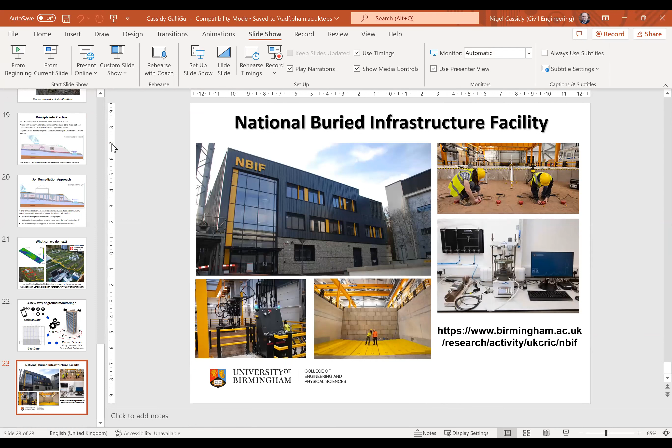Okay, is that still the slides? Yep, it's gone down to number 23. Okay. Okay, hopefully that should have all worked. See your presenter view, so see the notes and things. But... Okay, right. I'll try stop share. Like I said, it was working like a second ago. We'll see if we can get ourselves back on slide. You would think after all these years of running this, it would all work. Is that okay? You got me now? Yep, see the weird soils of Widnes. Excellent. Okay, cool. Fantastic. We got there. So sorry about that, everybody. As you can see, I'm just manipulating my prop at the moment. So I'll put that one to one side. Hopefully you can see me.

Welcome on to the talk. This is lessons for both me and for everybody else as well, I hope. But also a little bit, we were talking about this just before we started the talk, about how we need to maybe think about what we do about geotechnics, geophysics, geology, how we look forward about the information we've gathered over the past. So throughout the talk, I'm going to talk about some of the work I did 20 years ago, which is just as relevant today, if not more. Some of my experience of working with this weird material, and it is quite freaky in a good way, an interesting way. And also a little bit about what do we look for in the future and what can we do to help remediate some of these contaminated land legacies.

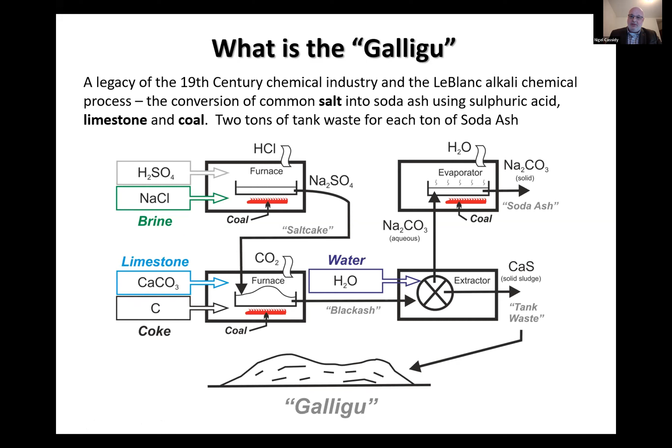So if you think of the sort of geographical connections around the UK, you need brine, limestone, plenty of coal, water, and also an environment to do this. And this is really one of the reasons why these industries built up in the areas we're familiar with. So the soda ash industry is predominantly around the Runcorn and Widnes area because of the brines and obviously the Lancashire coalfields, but also the ports.

But Glasgow, Manchester, particularly a place called Bolton, there's an interesting little case study about that. Gateshead up in the northeast, and also in the West Midlands. And I'm talking to West Midlands people here. I don't know where they are in the Black Country, but I believe there were a couple of smaller Galligu sites somewhere in the Midlands. And afterwards, when we have a chat about this, I would love to know where they are to add them to this lexicon of Galligu sites in the UK.

And it's very interesting if you look at the history, part of that process is not only the geological and geographical, but also about basically the land and the people. We needed water for the processes, but we also needed the water to actually transport the materials to the ports. So you see the connection between the canals and the ports. We also needed the land, basically poor land, to dump the wastes.

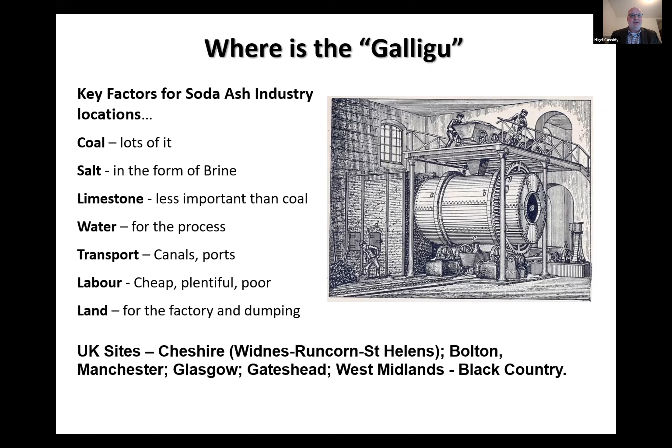And you need plenty of cheap and plentiful poor labor, people who needed the money, because some of the accounts you read about what they were doing, having to carry hods of sulfuric acid around, and the environment they lived in really tells us a little bit about our industrial history. We talk about countries in other places treating workers. We've done the same ourselves, and this is a legacy in our contaminated land of that.

And there's a problem with the Galligu. I worked on this 20 odd years ago, and in the Runcorn Widnes area, there was a significant number of independent plants that used to take this Galligu tank waste and just dump it all over the landscape. And they actually used it as infill for the salt marshes around the Mersey. So if you go over the Runcorn Widnes Bridge now, from the Runcorn to the Widnes side, pretty much everything above sea level, particularly near the coastal marsh areas, is made of Galligu waste.

And in some places, this is 3, 10 meters deep as a deposit. And it's sunk into the marshes and into the alluvial sediments of that area. And there's hectares of this. There's over 200 acres of known highly contaminated sites. But the whole area, the Runcorn Widnes Bridge is built on it, the landing areas of the bridge, the railway line, the expressway, freight terminals, shops, houses, commercial retail were all built on this waste. And the principle then was to cap it, seal it, and not worry about it.

But one of the big problems is it gives off hydrogen sulfide. It stinks, basically. It really does. If you ever drive over to Speke Airport from the Cheshire side or the other way, you get to Widnes and you go, what's that smell? And you can smell the hydrogen sulfide in the air. And at the time, it was known, even the manufacturers, the processors, the historical records show that this horrible smell of rotten eggs around these plants, not just Widnes Runcorn, basically blighted the whole areas.

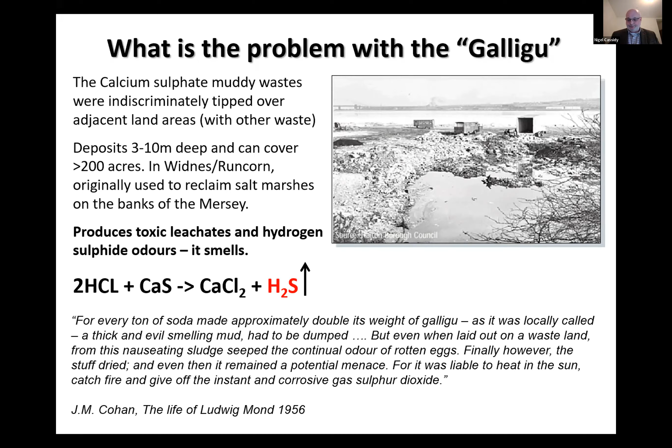So let me tell you a little bit about a classic legacy site, and there is a kind of geotechnical environmental end to this, but it's the fantastically named Nob End site in Lancashire, which is just south of Bolton. It's on the confluence of the River Irwell and the River Croal. Now, this was a site that had a LeBlanc processing manufacturing centre from the mid-1800s, and was dumping this waste into this promontory. I hope my mouse is working. So the Nob promontory between the River Irwell and Croal for best part of 100 years.

At the end of the 19th century, it was just demolished as a site and left in a relatively stable state for a long time. So I've taken this from Phil Sharples' historical blog and letter about this, and it's really interesting because he's followed this historically over pretty much 50, 60 years, about how this site has developed and what's happening to it geochemically and environmentally. If you go back to 1961, the site's a barren wasteland.

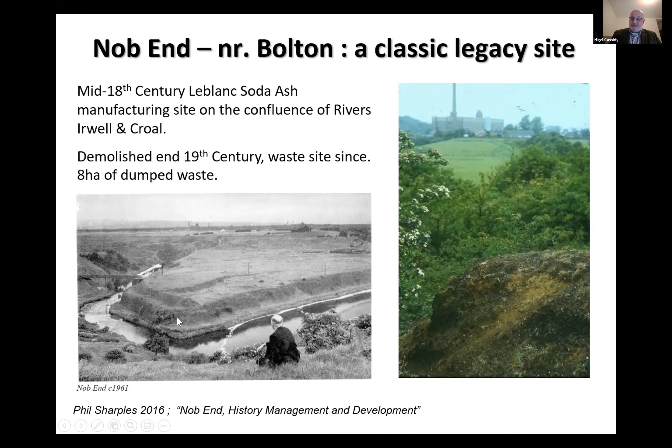And yet, as time moves on, in the 70s, it starts being left alone. It starts to develop its own ecostructure. So you start to see grasslands growing. And what you can see in the picture here, this sort of cliff wall on the sides of the River Irwell, this is all Galligu waste with some other waste in as well. And this whole area is just a mass of this waste, yet it's been left alone and left to basically sit there and start to self-remediate.

And what I find very interesting about this is when we look at the sites that we're remediating now, which we'll get on to in a second, there is a natural process operating at the surface of the Galligu. It's calcium sulfate. And as it starts to be weathered down, it starts to turn back into calcium carbonate. So we're actually getting a geological change, a diagenetic change, if you want to say, at the surface as the stuff is being weathered. And as that's buried, we're actually creating a layered chemistry in the soil. And that becomes important when we think about the geomechanical properties a little bit later.

If we look at this now, I took this from Google and from Dave Darlington's 360-degree image, taken in the last year. The whole site is a site of special scientific interest. It's actually a nature reserve. You can go take a walk around it. It's just off the other side of Little Lever near Manchester.

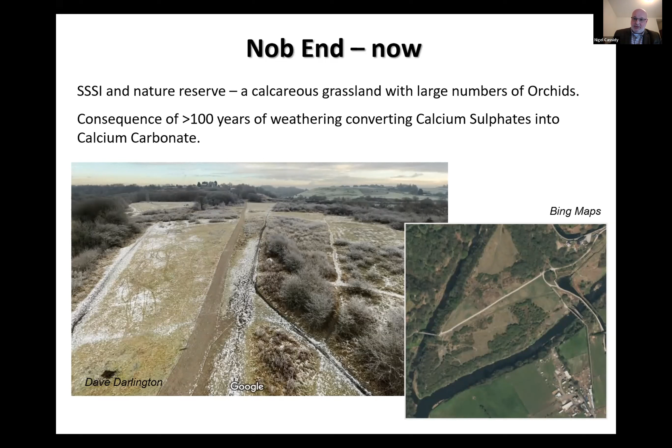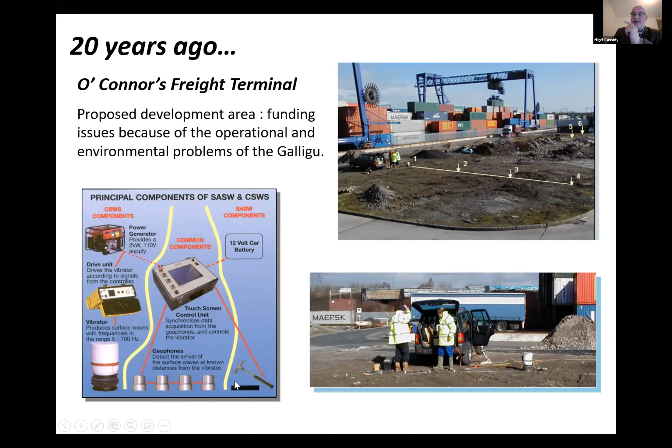So we did this trial, and we brought a team in to do a relatively basic survey that involves putting a sweep of frequencies into the ground, measuring the seismic response, and then determining the shear wave velocity through the Rayleigh wave velocity, and that moves us on to the stiffness. So going into a little more detail, this was cutting edge technology at the time. We have a vibrating seismic source, which is relatively commonplace now, and a geophone array, basic survey stuff.

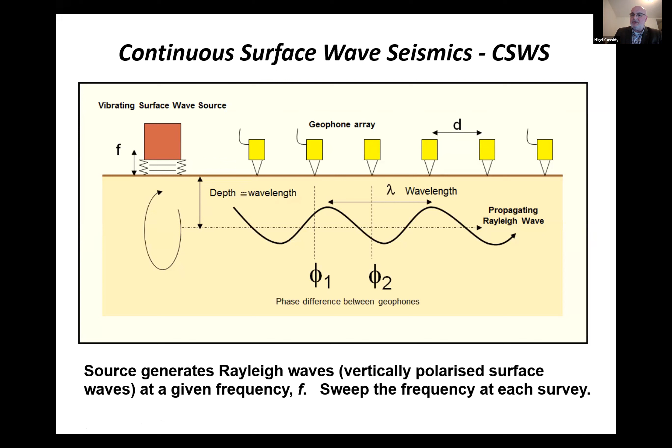But what we're able to do, if we collect properly, is understand the phase difference between the geophone positions, knowing their exact location and the fact that we are propagating in a known direction. And we sweep the frequencies roughly from 5 to 700 hertz in this instance, but now we can go higher, and pick up the surface wave, the Rayleigh wave velocity, which we then convert to a shear wave velocity with depth. And all we have to do is know the density of the materials.

We don't have to know it highly accurately, but we have to know it with enough consistency to be able to do that conversion. And the theories are here, but the important thing is the result is a stiffness profile with depth. And because the Rayleigh waves sample a deeper section of the Earth with lowering frequency, we end up, once we invert, and we have to do an inversion process through that. So the mathematics has improved over the last 20 years dramatically. We get very accurate results, but how representative?

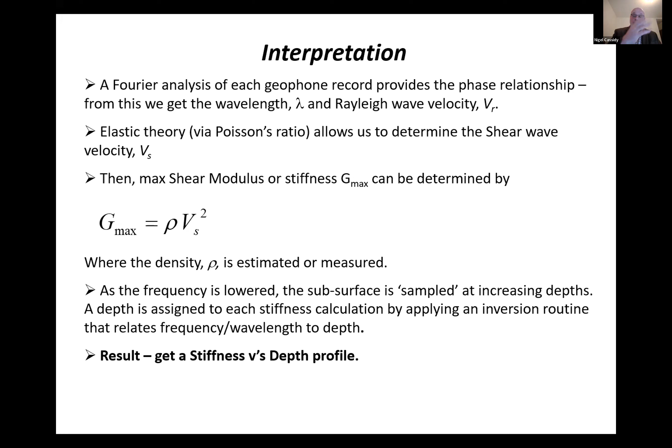What is really important, and it's important for me, is the materials don't change over small periods of time. So even though we might not be fantastically accurate in an absolute way, the relative difference in S-wave velocities helps us understand the stiffness profiles relatively, and that allows us to have a before and after comparative monitoring process for any remediation we may want to do for any of the Galligu sites.

And if you look at the depths, and this is important, the depths that we're picking up just with this active method, we're getting down realistically to 12 meters, in some cases 15, depending on how well the signals travel through the ground and how attenuated it is. But importantly, at the higher frequencies, and up to about 1 kilohertz is really where we go, you're getting that very near surface resolution. And that's important because as an active method, you're getting the depth and the accuracy and the shallow resolution and accuracy to give you a complete profile. It also means, because it's an active source, it's controllable, and you can repeat it on a regular basis.

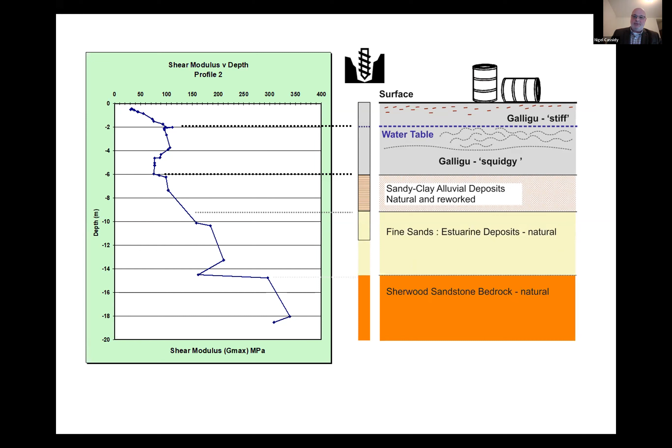We found that actually you don't need to have a very good handle on the density as absolute. As long as you have a good mass density, you bring out the relative changes in the stiffness profiles, because all the materials are very similar in density. So actually, any changes are related to the stiffness properties, the geomechanical, geotechnical properties. Not all sites will give you that, but it gives us a little bit of hope for future monitoring.

And so how do we fix this material? Well, predominantly, the current methods are we basically encapsulate it in concrete. We mix it with cementitious material. We create these little pellets, these hard pellets, and we put it back in the ground. And this was trialed on the site 20 years ago, and cement-based soil stabilization is still the preferred method. They either do it in soil, I'll give a little example in a minute, or they do it externally and put it back in.

And this adds lots of problems for contaminated land sites, issues, materials in, materials out, etc. But the point is that this actually starts to remediate the geomechanical properties. It makes it stiffer. It's expensive. It takes time, but you can create areas, rafts or blanket areas where you can remediate the materials. You're effectively creating a slab of stiffer materials, but only at this time. So you're adding concrete, stabilizing. The Galligu material is still wrapped inside these balls. It's still there as part of the subsurface.

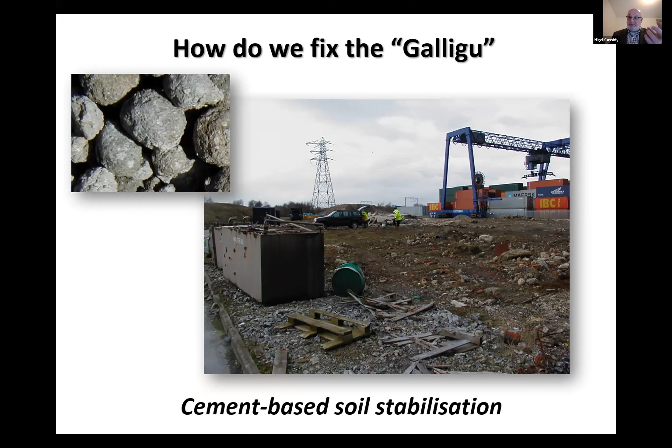And they would have to remediate the site, and they looked at the soil cementation process. But they also wanted to do an activated carbon plume remediation program where they're stopping these leachates reaching the canal, which is an absolutely great idea, a fantastic case study, very much based in my mind towards the environmental aspects of this, with the geomechanical, geotechnical aspects.

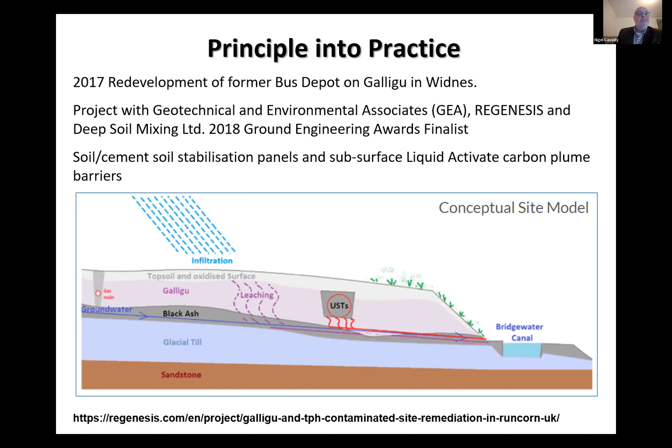And their remediation strategy was to put in an in-situ remediation, create the cement stabilization, mixing the soils. A company called Deep Soil Mixing were involved with this. I'm not familiar with them. And they created these blankets, these patches of stiffened ground in situ that still contain the Galligu, but were a lot more stable. And they were small, in a grid of small panels across the whole site, which is a fantastic idea. They put the plume stop barrier in to stop the leachate getting through, and they created what I think is an excellent remediated site to address the issues that we have now, and they're able to build on it.

But, and this is my question, and this is why I want to open up to the future and the questions with you guys as the geotechnical people of the future. Have we really, and I'm using the we here, not this company, have we really considered what the long-term shear stress, loading and strain relationship is of this material, the Galligu, which is now flattened and moved, over time? Because these have now become relatively elastic panels with load acting on the soft material, which has spread the load and creates a relatively low strain percentage, but then puts a long-term loading stress onto this mass.

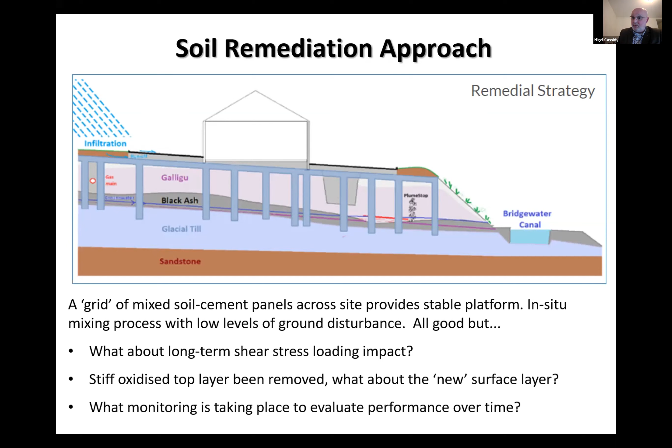Well, myself and my colleague Ian Jefferson at the University of Birmingham, who may even be on this call, over the last 10, 15 years, we've been looking at electrokinetic stabilization of London clays. And it's a similar situation. We get shrink swell, and without going into detail, we pump fluids into the ground, we charge the ground electrically, and the anode-cathode relationship, the electrokinetics, moves the materials together and they cement the clay, making it more geotechnically stable in situ.

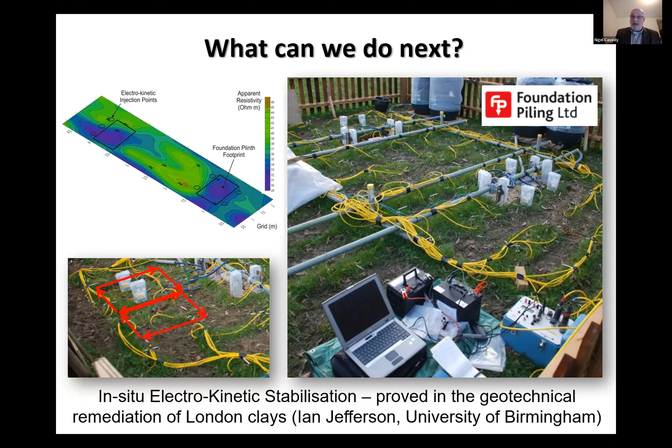It's been proven on the clays. We could apply those principles in the ground to the remediation, which means that we don't have the direct interference in the ground. We also need to look at how we monitor in a cheap way, in a consistent and long-term way. And this is where my research and the research we're doing at the university has really led me to thinking that our new world of data-driven science is perfect for this.

We've got the baseline geodata. We can get the stiffness, and we don't need to have active seismics, active high frequency, low frequency vibrating sources. We can use the natural frequencies of the noise around us. Passive seismics has moved on in 20 years, to give us stiffness profiles in the ground with relatively cheap instrumentation, basically geophones installed in the buildings and on the ground.

And I've been doing it here regularly, and we can get the time-dependent change of the stiffness profiles that help us monitor it. And also bring in, and I use the words loosely here, societal data, the data around the usages of buildings, the transport networks, to show us where the hotspots can be, the actual loads on there, the time dependence, to help us improve geomechanical and geotechnical models and models of the rheology of this material,

so that they can put these into digital twins and we can learn through machine learning where the perturbations are going to result in something that's a problem, and where we have to do an intervention to solve that problem. So we're solving the future and making that data and understanding suitable for the future legacy issues, remediating the legacy rather than just remediating the issue. And I think that's important for us.

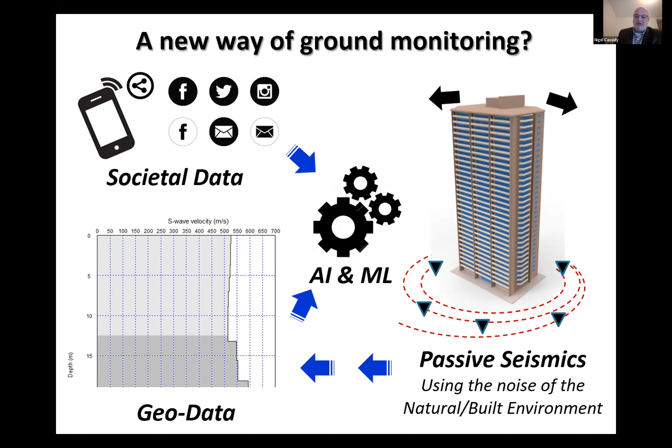And I think that's where the next generation of geotechnical science is going to lead, to help us get these sites, which at the moment are left because they're problematic, to be remediated and then give us some benefit and value in their land. And it's about the understanding and the technology, and I'll leave you with a little bit of what we're doing at the National Buried Infrastructure Facility at the university.

We're leading to this by providing that whole understanding geophysically, geotechnically, and with the physical scale models to be able to actually do this in a safe environment and apply it to site environments, so that when we go through trials and we get that data, the legacy of the future is about the legacy of our really high quality data and understanding, rather than a site that's just been left and we don't know what to do with it again, a bit like we did 100 years ago.